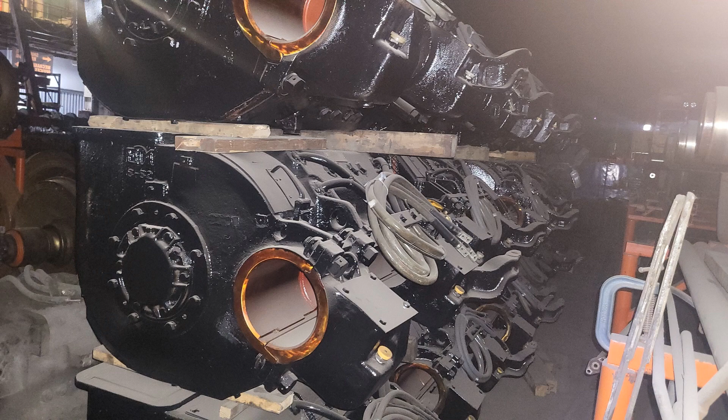In the last video we talked about brake rigging, which is what makes us stop. This time we're talking about traction motors, which is what makes us go. And this is going to be a pretty long one, so brace yourselves.

The list of topics I'd like to include today includes the parts of a traction motor and what they do, how we assemble combos, some of the lubrication and servicing requirements of traction motors, the different gear ratios used for different classes of service. Then we're going to get into a little bit of component theory and talk about how traction motors work, how we switch direction, and how we set things up for dynamic braking and stuff like that.

And then while we're talking about component theory, I'm also going to mention why DC? Why do we use DC traction motors, especially considering more modern locomotives use AC traction motors. So why do these old ones still use DC?

And then before we close out, I also have a couple pictures of some catastrophic failures I got that I think you guys will like to see. So with all that out of the way, let's get right into it.

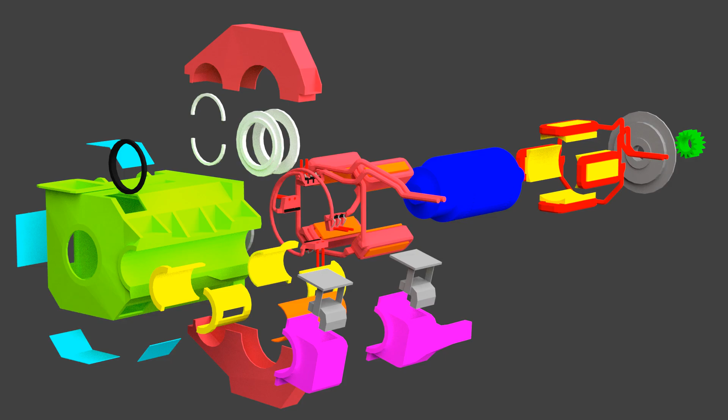Alright, so traction motor parts. What you're looking at here is actually a 3D model of a traction motor that I made. Before we even really get started, I'd like to mention that this model is actually incomplete. Even with all of this, there's still some pieces that are missing, and there's still some stuff that I'm going to kind of hand wave away because I haven't had it apart enough to be able to tell you exactly what everything looks like. Looking at this picture, we're going to ignore some parts now that are going to come into play later whenever we actually talk about combos, so that'll get rid of some of this stuff.

And so that leaves us with this, and this is what we're going to talk about for now. So the first thing we have is this big green block here, and this is the motor frame. The motor frame supports everything predictably, and it also is enclosed on one end, and that actually makes it act as kind of an air duct to help direct the cooling air around the electrical components inside the motor. And it comes equipped with these blue covers that can be removed, and it allows access to the inside of the motor to help perform maintenance or troubleshoot things and the like.

The next thing we have here is this armature support bearing. All this really is here for, this is one of those things I haven't had apart. All this is really here for is it supports this end of the armature and lets everything spin freely.

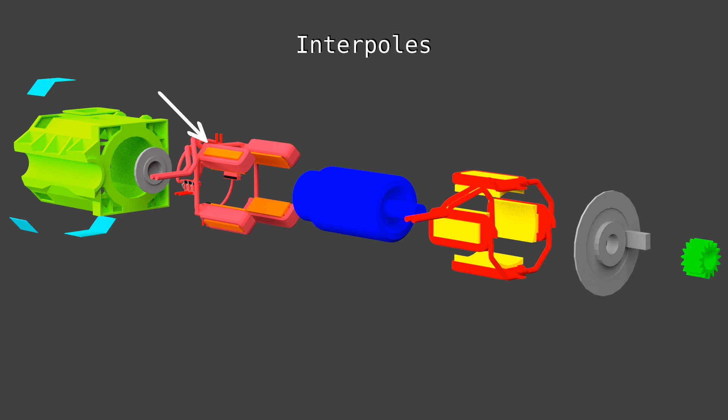The next thing down the line on the model here is the A-leads. And these A-leads feed power to the armature, and also connected to them are these interpoles here. These interpoles, as well as the main poles, consist of a stack of iron laminations to reduce eddy current losses, just like in any other electric motor. But you have this stack of iron laminations that makes a core, and then you have a coil of wire going around it. These are called interpoles, and the interpoles help the electrical characteristics of the motor. It helps ensure proper commutation, which we'll talk about a little bit here when we get to the armature, which is actually next.

The armature here is what's powered by the A-leads, and in a sentence, you put electricity in the motor and you get torque out, and that's how we move down the rail.

I mentioned commutation just a second ago, and what commutation is: as this armature turns, there's a series of bars, which I'll show you in a minute. It's called a commutator because if you know what a commute means, it's where you move from one place to another. Well, the commutator makes it so that the current flowing through the armature moves from one spot to the next down the line as the armature rotates. And that's actually what those interpoles are there for, because as this armature spins, it can distort the magnetic field we have inside and cause issues, so we put these interpoles in to help stop the motor from flashing over.

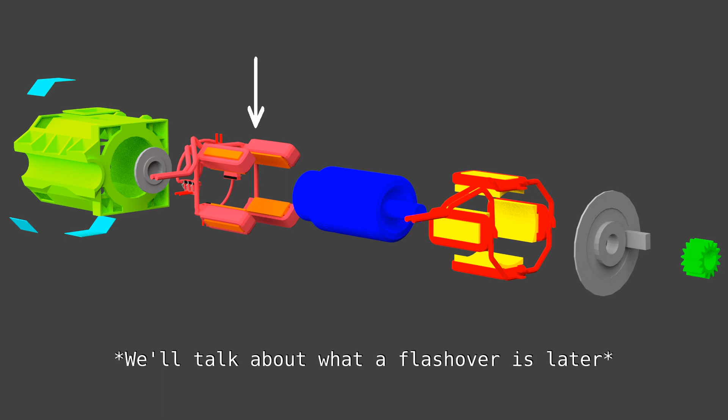Then we also have, on the other side of the armature, the F-leads, which are the main field windings. These are the bigger poles, the main ones that actually provide the torque to turn the motor.

Then we have another armature support bearing past that, and the housing for it is a little bigger than the other one. That's because the way this motor is assembled is you bolt the one armature support bearing in, and you can put all the field coils and interpole coils in. Then you can slide the entire armature down through this side, and put this bearing on the outside, and that's how the inside of the motor is actually assembled.

Then the last component we have out here on the end is the pinion gear. This pinion gear mates or meshes with the bull gear that we talked about on the wheel set. So when this pinion turns, that's what actually applies the torque to the wheel set.

Now, like I mentioned, some of this stuff I kind of hand-waved away a little bit, so I'll zoom in specifically on these parts here on the A-leads. These are called brush holders, and I didn't really model them the greatest because I haven't had a ton of them apart, so let's look at some actual pictures of one of these.

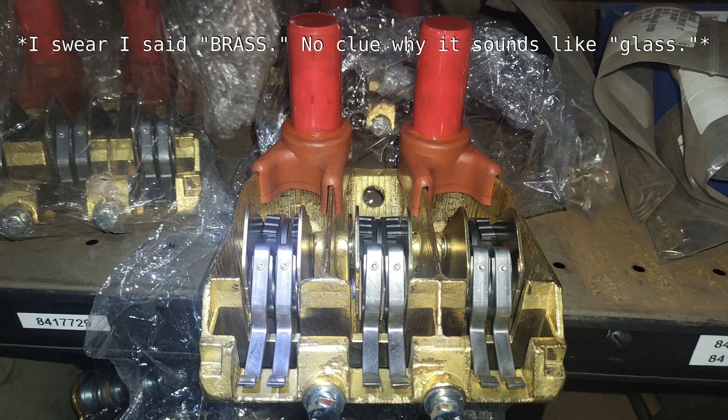So this here is a brush holder, made out of brass, and we have these two red prongs, I don't really know what the technical word is for them. They stick up, and they're wrapped in insulating material, and then these are bolted into the traction motor frame. So these brush holders can actually be adjusted to get the proper clearance from the motor commutator.

The brush holders, predictably, hold the traction motor brushes, and they are held down by these gray hammers here. These hammers are spring-loaded, so whenever you put a brush in, these hammers will put a little bit of pressure on it to keep it in contact as things move and shift and rotate.

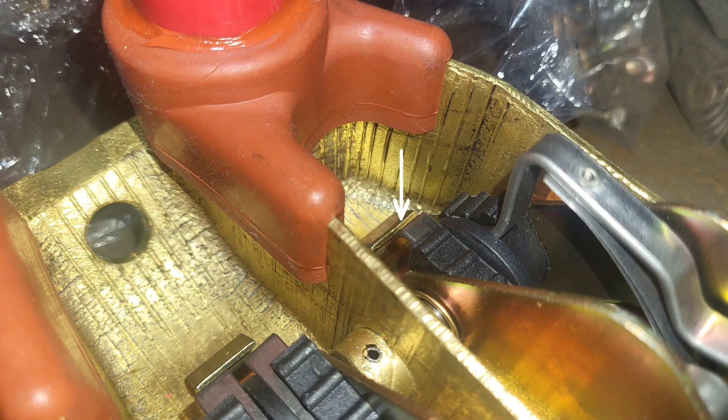Now, to get the brush in or out, there's actually a little tab behind these hammers to where you can lift the hammer up off the brush and slide it down, and it actually locks the hammer in a raised position, so you can pull the old brush out and put the new one in. Now, what's a brush look like?

I've talked about them. Well, this is a picture of what this all looks like when it's actually put together. And here you can see we have these three brushes, and these are just blocks of carbon, I think they're just graphite. And they have these little lead wires come off of them that bolt to the brush holder, because the brush holder is where they actually get their current supply from.

So whenever you change these brushes out, you actually have to unbolt them, pull the old one out, and then bolt the new ones in to ensure you have good connectivity. And you can pull the hammers back out, and they'll press down on the top of the brush just like this shows, and then that pushes them against the commutator.

And here you can actually see what the commutator looks like. You got a bunch of copper bars, so as the armature rotates, the brush makes contact with one bar, then the next bar, then the next bar, and so on down the line. So that keeps the magnetic field of the armature in a good spot to get a lot of torque out of it.

And then while I'm in here and this motor has the cover off of it, I'll show you a picture of what the rest of the armature as well as the main and interpoles actually look like when you look in at the motor from. It's kind of a weird angle that you don't get to see when it's actually inside the truck frame.

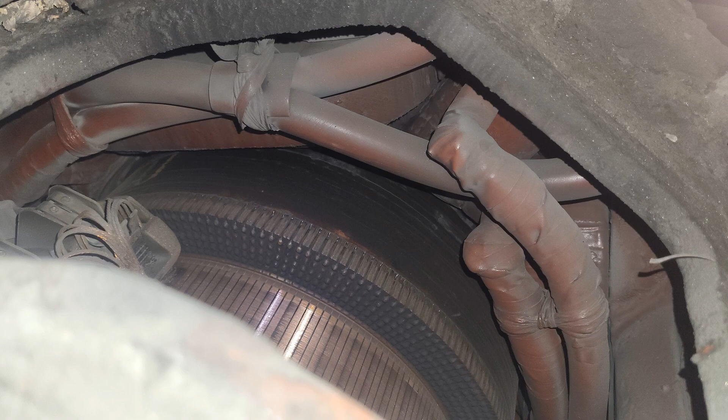So, here's a picture. Here you can see you got the two main poles on the top of the motor and the front of the motor. Then we have an interpole here, and there's another one over here. And then, obviously, the other side of the motor, there's two more main poles and two more interpoles. That's a little picture of what some of the guts of a traction motor look like.

A for armature, F for field. The A and AA leads both feed power to the armature, and the F and FF leads both feed power to the field. These do matter if you ever have to take one of these apart. It's important that A and AA, and so on, don't end up mixed up, because if you do mix them up, bad things can happen. Keep that in mind as we go forward.

Yeah, that's pretty much all the parts of a traction motor. That honestly didn't take me quite as long to get through as I thought it would, so I guess that's nice. Now we're going to move on from here to actually assembling a combo.

Alright, so on to talking about combos. Before we talk about assembling them, I'll blitz through some pictures of some actual combo parts, because I don't have these necessarily modeled 100% faithfully—it's honestly been a while since I've actually had a traction motor apart. So we'll blitz through some quick pictures of some actual parts, and then go through the rough idea of how to assemble them.

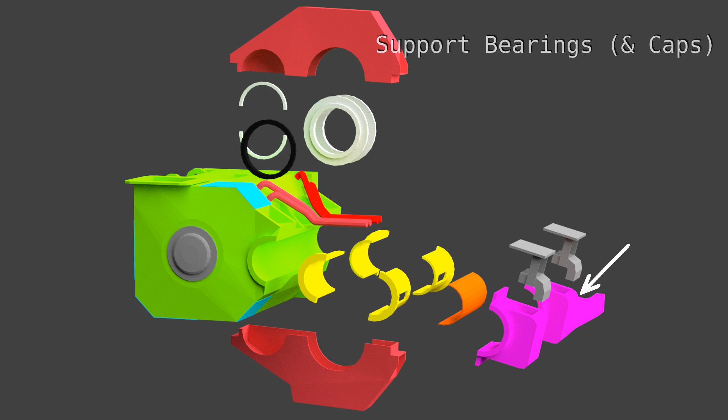Starting with combo parts, you're going to have the support bearings, the support bearing caps, and an axle shield. The support bearing caps have wicks in them for lubrication. You have the gear case, which I'll often refer to as a crater pan, because that's what our truck shop foreman calls them. Then we have a bunch of seals between the pan halves—inner and outer pan seal, a pinion seal, and then a dust seal on the other side of the axle.

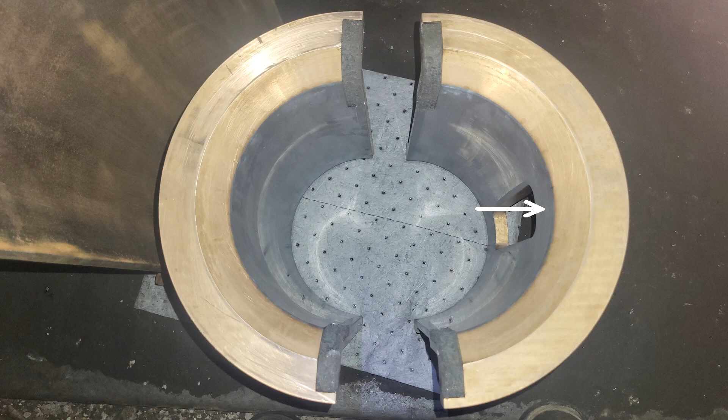First things first, let's talk about support bearings. I'll throw a picture of one up here for you. We have a motor half and a cap half of a support bearing. The way you can tell them apart is the motor half will be solid and the cap half will have a big slot in it, and that slot is for the wick. If you look at the outside faces of the support bearing halves, you can see they have these wicks on them. These wicks are there for lubrication, and they provide lubrication to the hub of the wheel as it shifts back and forth during movement.

If you look at a picture of an actual support bearing cap, you can see it has a slot for the wick, and they're also hollow on the inside, holding a reservoir of oil for lubrication. You can also see that one of these support bearings has this arm sticking off of it, and that's what supports the crater pan. Whenever you assemble these, they have a set of shims that go between the support bearing cap and the motor when you bolt everything together. Just wanted to mention that.

We also have the axle shield. There's not really anything special about it—it's just there to cover the axle and keep dirt and grit out of the support bearings, so we don't wear things out faster than we need to.

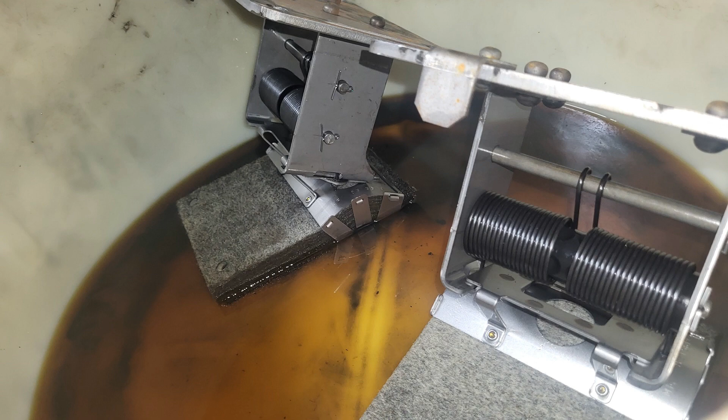The next thing we have is wicks, and I'll throw up a picture of some wicks we have. They're hanging out in a bath of oil to soak, so they're pre-lubricated, if you will, for when they get assembled into a combo. These wicks sit inside the support bearing caps, and the support bearing caps are full of oil, so the end of the wick sticks down into that bath of oil. Just like a wick in an old oil-burning lamp, it wicks that oil up, and as the axle turns, that oil sticks to the axle and gets spread throughout the bearing to lubricate everything.

The next thing we have is the gear case, or the crater pan. The crater pan comes in two halves, an upper and a lower, and the top half has a slot where the bottom half mates into it, and that slot has a bunch of seals that go in there—the pan half seals we'll talk about in a minute.

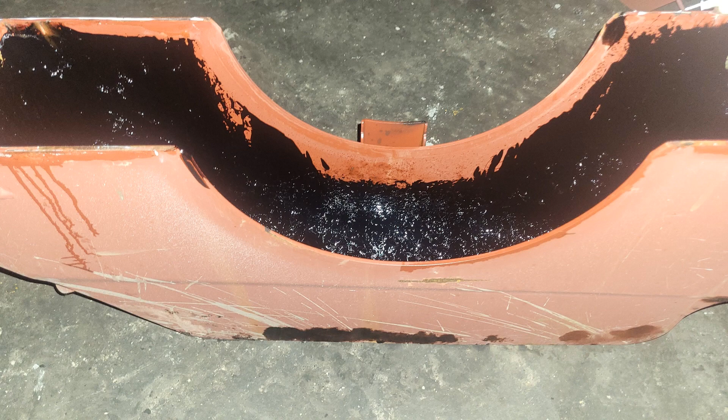Some of these gear cases are lubricated with oil, and some with grease. We'll talk about that in a little bit. But to know the difference, an oil pan on the bottom half will have either a drain plug or a snap cap. A grease pan will have, on both halves, a spring-loaded cap that'll look something like this. This one's dirty as all get out, but it'll look something like that.

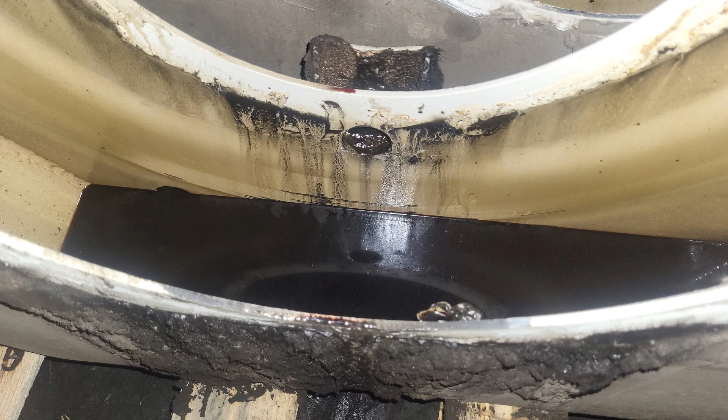If it has one of those on both halves, that is a grease pan. Many, although not all, of these crater pans also have overflows in them, so if you put too much oil or too much grease in it, it can actually run out onto the ground. So you don't want to overfill them, but you do want them full.

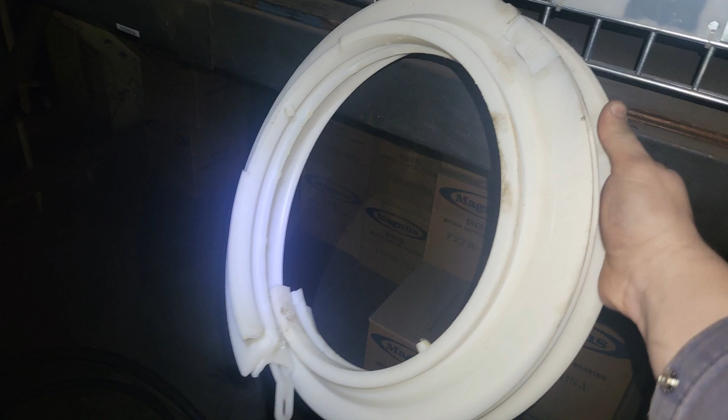As far as seals, these are the pan half seals. They go down in between the pan halves, and they get silicone and everything whenever they go together. We have the inside crater pan seal and the outside crater pan seal. They look slightly different, and the inside seal and the dust seal both have these little bumps that stick out, and there's actually matching holes drilled into the support bearings that hold these seals in place so they don't rotate. We also have the pinion seal, and the pinion seal comes in two halves.

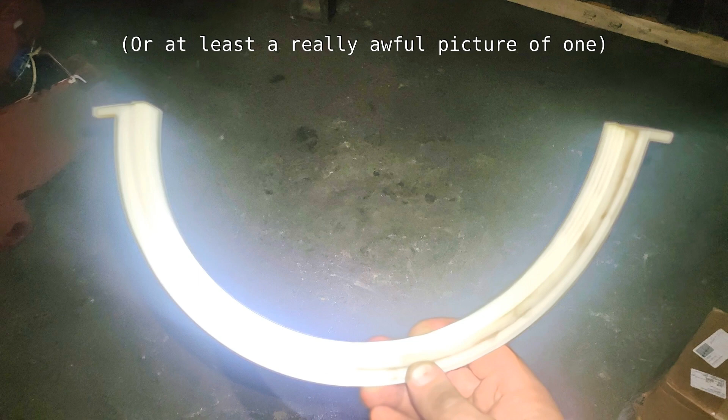Those two halves will look just like this. I know some of these pictures got washed out, I apologize for that, I'm not a great photographer, but the pinion seal comes in two halves, one in each half of the crater pan. Then when you bolt it together, that's what makes the seal around the traction motor.

And then we also have this dust seal, which is on the other side of the axle. And just like the axle shield, that dust shield is there to try and keep grit out of the support bearings. So that was a pretty quick crash course, blitzing through some of the parts that I ignored when talking about the traction motor.

So let's go to a rough overview of how we actually put one of these together. Normally, we'll stand it up on its end so that the bearing end is pointed straight up. So you're going to have to picture all this sitting like that. But we'll put the motor side support bearing halves in, and they'll have their wicks and everything all pre-assembled.

Then we'll set the axle in. Then we'll put the cap side support bearings on and the axle shield. Then we'll put the shims and the bearing caps on and get ready to tighten everything down. Now these bearing caps, whenever you tighten them down, you actually have some funky stuff you have to do.

Because you want to make sure whenever you bolt this stuff down that the support bearings are lined up correctly. So what you end up doing, and it's a real treat, it takes two guys to do this. You'll have one guy with two pry bars. He'll use one pry bar to pry the axle away from whatever side you're tightening. And then he'll use the other pry bar to pry the bearing cap you're tightening out against the wheel hub. That way you can make sure everything lines up flush and nice and pretty and goes together right.

So you have one guy holding all that, and then the other guy will take an impact and tighten these. And if I remember the torque spec correctly, they go to something obscene like, I think it's like 1,200 or 1,400 foot-pounds. Don't quote me on that, I'd have to actually go look. But yeah, you tighten the ever-living daylights out of them.

And then whenever you get to one side done, then you got to go do the other side. And there is one side that you're supposed to do first, I think, and I can't for the life of me remember, or it might not matter. But yeah, those are a treat to do. It takes two guys and a good bit of elbow grease.

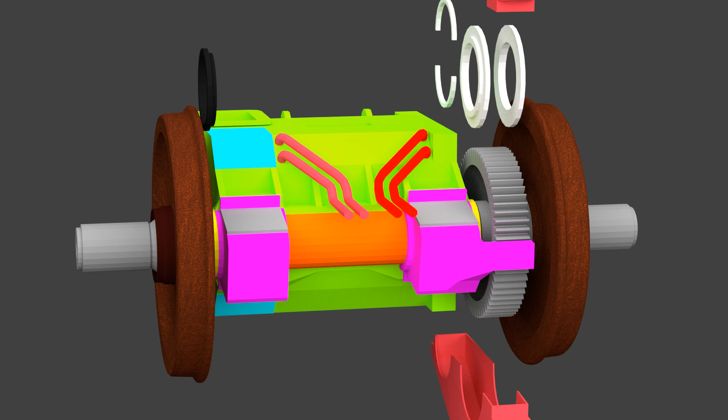Then the next thing we'll put in is the traction motor wicks. These have been soaking in a bath of oil like I mentioned, so they should have some oil in them to lubricate everything. Then you will take the dust seal, the inner and outer crater pan seals, the pan half seals, which I don't have modeled, and the pinion seals, and all assemble them all together into the crater pan.

And then the last thing we'll do is a lot of this stuff gets siliconed as it goes together too, I forgot to mention until now, sorry. You put all the seals in the pan halves, and then you bolt everything together. Some of these things you got to make sure they line up. But yeah, you bolt everything together with the pan halves.

There's different ways that these pans can be attached. Some railroads use huck bolts. Some of them have a special type of bolt and clamp that gets used. Huck bolts tend to be more reliable, but you also need specialty equipment to put them on and take them off.

There's ups and downsides to everything. Once you get the pan halves bolted together and everything assembled, the last thing you're going to do is actually test run the motor.

We have a welder that we can use for it. You hook it up, and all it does is shoot electricity through the motor. Because it's sitting out and not actually under a locomotive, it doesn't take much to get everything to turn. As you do that, you want to listen, make sure you don't hear anything scraping, grinding, or any weird chattering from the gears, or anything suspicious of something being wrong.

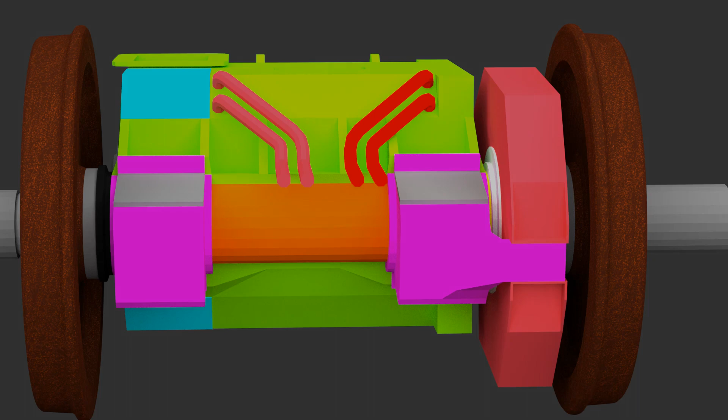That way whenever you put the thing in, it's going to perform and not destroy itself. So that's a quick synopsis, a brief overview of what it takes to get a traction motor combo put together.

I'll mention a little bit here too—we'll talk more about this in the next video on truck frames—that these combos can actually be changed if you have a drop table or something like that, without removing the truck from the locomotive. It's kind of neat. These traction motors are actually suspended on the axle by your support bearings, and the other end is suspended by something called the nose suspension, which is in the truck frame.

That nose suspension is there because as the motor tries to turn, which is easier—to move an entire train or to lift this little 5 or 6 ton motor? It's going to try and move the motor. So whenever it tries to turn the wheel, the pinion on the motor is going to try and walk around the axle, and that's not great. You want to absorb that force, but you also don't want to be slamming stuff back and forth.

So they put a spring pack in there, which will look something like this, that holds up one end of the motor. Now, to get that motor out, provided it's in a friendly place for you on the truck, you can actually block the truck frame.

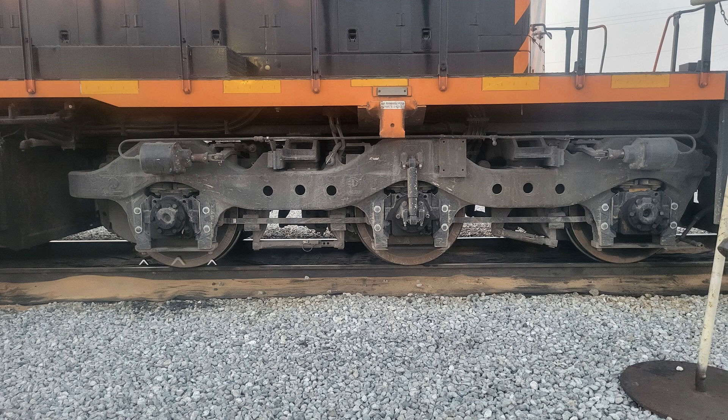You can take two bolts out and drop this thing out on each side. This is called the pedestal tie bar. If you have single shoe brake rigging, that's all you have to take out. But if you have clasp brake rigging, now you have to take out the brake straps too in order to get this down out of here.

Remember when I mentioned that clasp brakes are kind of not preferred because they're a pain for maintenance? Yeah, this is one of the things—brake rigging almost never wants to come apart. Anytime you got to drop a combo out and you have clasp brake rigging, you have to take the brake straps down, and it's a pain and a bunch of extra work.

So with the single shoe brakes, all you got to do is pull the pin out of the slack adjuster. Then you can just drop the pedestal tie bars, and you can actually lower the motor and it'll pivot off of that nose suspension, and then it can be dropped out without having to remove the truck. It's a pretty neat little thing that we do.

I don't have a ton of pictures—hopefully I can put an animation of that together in the next video when we get to truck frames, but I figured I'd mention it here because it was kind of neat. It does act as a bit of a segue into our next section, which is on lubrication and maintenance anyway, so let's talk about that.

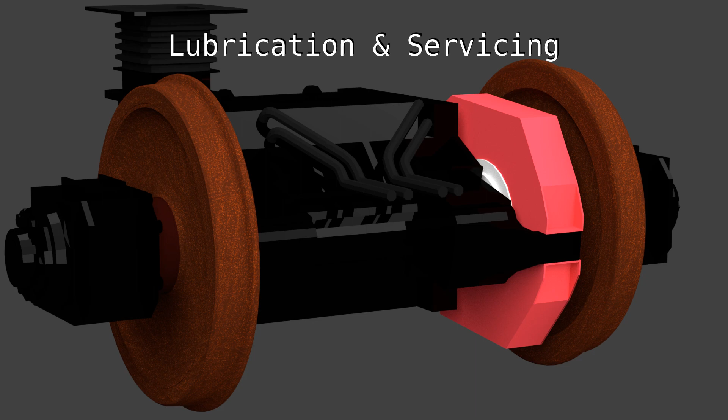Alright, lubrication and servicing of traction motors. As usual, whenever talking about maintenance on the railroad, the FRA has something to say about it, although in this case there isn't that much. The only part that deals with anything is 49 CFR Part 229.91, which covers motors and generators. We'll blitz through that relatively quickly because there ain't much to it.

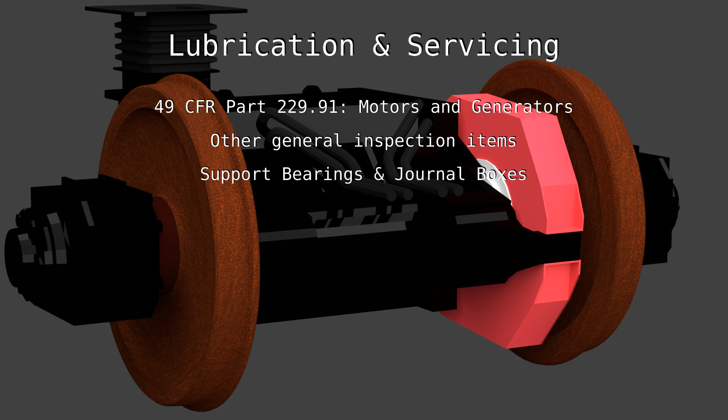A small amount of your inspection items stem from 49 CFR 229.91. It basically states that a motor or generator may not have any of the following conditions: A, be shorted or grounded; B, throw solder excessively; C, show evidence of coming apart; D, have an overheated support bearing; or E, have an excessive accumulation of oil.

Shorting or grounding of a motor can be checked with a device called a megohmmeter. What a megohmmeter does is take a voltage and step it up to something stupid high. I think the one we have goes up to 5,000 volts, and it flashes that into the system and looks at how much current that's able to push. That's a way for checking insulation in high voltage circuits. It's also called a high potential tester.

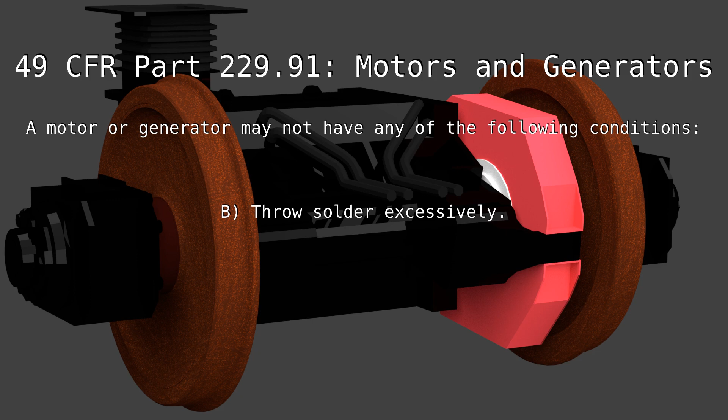Throwing solder has to do with arcing and flashing inside the motor, because arcs get really hot and they can melt things, and one of the first things to melt is solder. It'll fling it out on the end of the motor, and usually they look like little BBs.

They cannot show evidence of coming apart. That really has to do with bearings, cracks, bolts being loose, those types of things. You don't want to see an overheated support bearing, which usually there will be more signs than a heat signature, because these motors tend to have pretty thick paint on them and a lot of dirt. So you don't really see a heat signature, but you'll usually know if the support bearing's bad.

Motors also aren't allowed to have an excessive accumulation of oil. That accumulation of oil is, in a lot of cases, going to come from the car body above the truck. It'll leak down and drip onto the traction motor. So they just can't be completely covered and running in oil. A little bit here or there isn't a big deal, but you don't want a ton of it.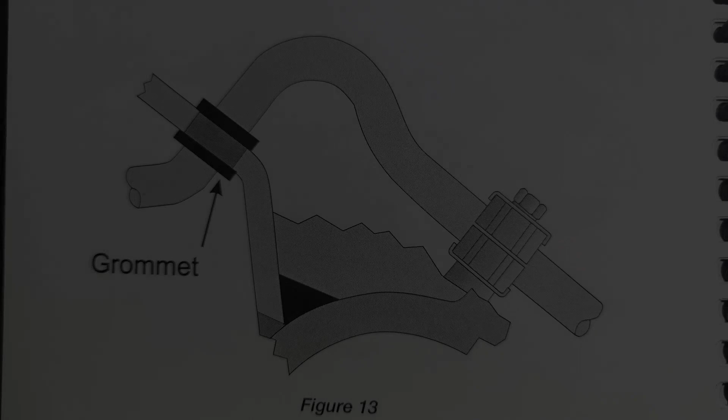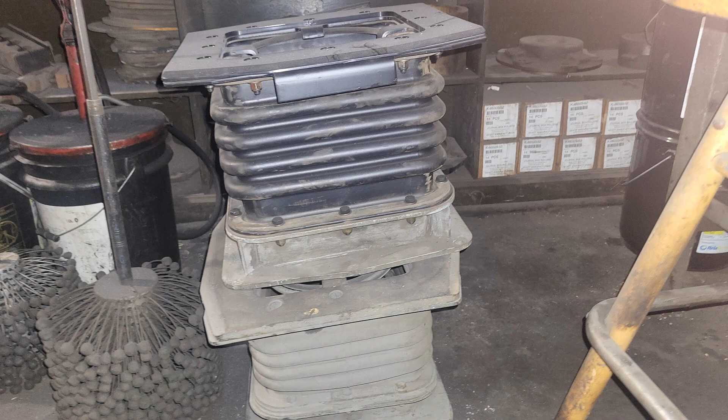Other things that should be checked whenever you're looking at a traction motor: you want to check condition of things like lead clamps, the grommets that the leads go through. You want to check the snap caps, the cooling air duct to make sure that's in decent condition. And you want to check any seals you see, your crater pan seals, your pinion seal, and the traction motor covers. Those covers actually should also have gaskets under them, because if there's not a gasket there, your cooling air can basically bypass the motor. It'll come down the duct and out the cover instead of actually going through the motor.

So that kind of covers your general first look at things. When it comes to support bearings and journal boxes, these are both lubricated with the same oil. It's called car oil or journal oil, and I would suspect that term actually stems from back when we used plain bearings or friction bearings. This was the same oil, I'm guessing, that got used to lubricate those bearings. So it's still being used to lubricate axles, just now we have roller bearings instead.

Both usually have a snap cap where the oil is added. I'll point one out here because I've mentioned these a few times. I don't think I've ever actually showed one.

Both the support bearings and journal boxes, if you look at the oil, you want to check for any signs of failure. Usually that'll be in the form of metal particles. If a bearing starts to fail, usually metal will start to flake off and get into the oil and start getting mixed up with it. So if you open one of these and you see metal particles, that's a pretty good sign that something is wrong.

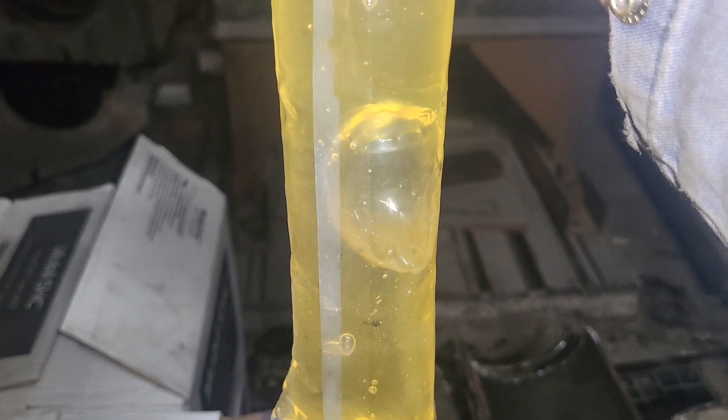The oil is a very heavyweight oil, and I'll throw a clip of it up here, some of that oil in a bag, and if I flip it over you can see just how long it takes for the bubble of air in that bag of oil to actually reach the top. It's very viscous oil, because it's dealing with a lot of pressure. It's very sticky compared to most oils because we want it to stick to the gear and actually lubricate everything.

Grease pans will contain what we call crater compound or crater grease, hence the nickname crater pans. And that also comes in bags, and they usually look like this.

This is like an actual soft-ish kind of grease. Here's a video again, you can see you can squeeze it, but it's not a liquid, it's an actual grease. And again, this is very sticky, and a lot of railroads seem to use this. We don't, just because it's a pain in the butt to deal with whenever you're actually assembling combos.

A big thing that's nice about grease is that grease doesn't leak like oil does. This grease is also very sticky because, again, we want to make sure that as everything speeds up in there, you're going 60 miles an hour down the track, you don't want to fling all the lubrication out of your gears and burn things up.

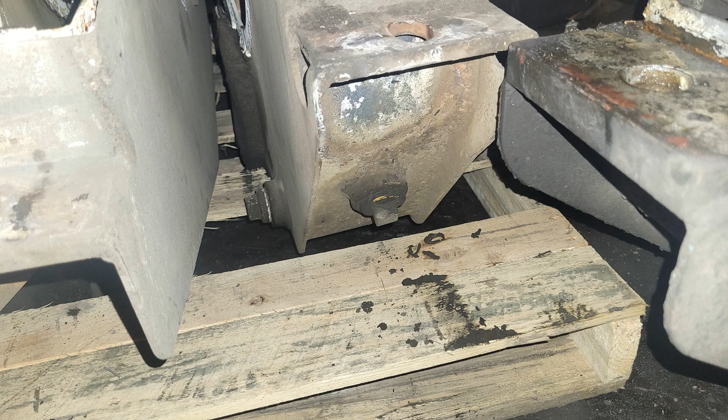To check the lubrication level in these pans, usually an oil pan will have either a drain plug like a differential or a snap cap just like the support bearings and journal boxes, and you can pull that out and look in and check the fill level. You can add oil through the plug, or usually there's another plug on the top half of the pan. You can open that one and add.

I usually like to keep about 3.5-ish inches in the bottom of the pan. That's just a rule of thumb. Different railroads and different pans, I'm sure, have different numbers.

Grease pans will typically have a spring-loaded cap, and that cap can be removed with a special tool to check the amount of lubrication that's in there. And those big caps are how you can add bags of grease or oil to the crater pan.

This is kind of hilarious to me, because the first time I found out about this, I assumed you would cut the bag and squeeze all the grease out of it. But no, the first time I saw this, it was a brand new combo we just rebuilt, and we were test running it.

Before we set it down and put it back in, our truck shop foreman lubricated it, and all he did was just held up a bag of oil or a bag of grease over the gears while it's sitting there running and just dropped it in, and the motor just bogged down and chewed it up, and he dropped three or four of them in there. So yeah, those bags can just go in, plastic and all, and the gears are just om nom nom and chew the plastic up, and the lubrication does its job.

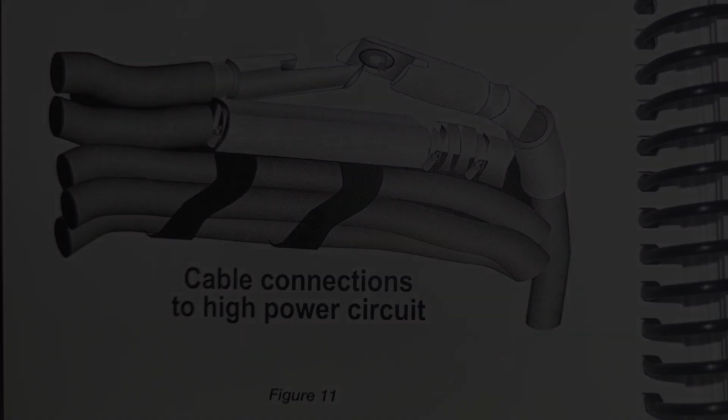Other things you want to check about the cables: check for cracked insulation, cuts in the insulation, broken wires, and signs of overheating. You want to make sure they have lead boots, with no signs of overheating, cracks, or wear. You want to make sure the lead boot is properly positioned, supposed to be at least 2 inches from the exposed metal on the lug. So you put the lead boot on, bolt the lug up, and then slide the lead boot up so ideally it's centered over that lug connection area, and that provides your insulation.

In addition to your 4 main leads that we talked about, there's also a smaller ground strap that should be checked. You want to make sure it's connected tightly to the locomotive frame, and also make sure that it's not broken.

The insulation doesn't really matter on the ground strap, because all this is here for is if something inside the motor arcs somewhere it's not supposed to, this will allow that current to flow back to the car body, which will trip the ground relay and let the crew know something is wrong. So the insulation doesn't really matter, but it does have to be on there tight and it can't be broken, or else it doesn't work.

If you are removing a motor to replace it, you should label the cable connections on the locomotive end, which one goes to which, because sometimes it's not very obvious, and if you hook them up wrong you can have a traction motor that doesn't work at all or one that loads backwards. Ask me how I know you can do that, because that was a fun day, let me tell you.

Alright, so gear ratios. This seems like kind of an odd topic because diesel-electric locomotives don't really have a proper transmission. It's just a traction motor and then the axle. So there's no real transmission. You don't have gears to shift like you would in a car or truck, but there are different gear ratios that are available.

Usually when you buy a traction motor, they will come with a pinion on it, and you can order which pinion it gets. The pinion is held on with a specialty nut, and you can remove that nut and either pull the pinion off or cut the pinion into 2 or 3 pieces, and those pieces will fall off. So my point here is the pinion can be removed.

You can't really change the bull gear on the axle, you'd have to buy a different axle. But the ratio between the number of teeth on the pinion gear and the number of teeth on the bull gear determines a couple things.

It determines how much tractive effort you can get out of that axle. The more aggressive the gear ratio, the more torque you can put on the axle. It will change the minimum speed you need for continuous drag and full horsepower, because we'll get into that nuance way later on when we're talking about excitation. But there's a certain amount of speed a locomotive has to be going before it can actually put down its full horsepower to the rails.

And the last thing that the gear ratio affects is the top speed of the locomotive - this is the other side. The more aggressive the gear ratio, the faster that armature has to spin in order to make top speed. I'm not sure if it's limited based on how fast we can spin the armature before it starts to arc and do weird things electrically, or if it's more of how fast can we spin the armature before it starts to fail mechanically. But either way, the more aggressive the gear ratio, you get more pulling power and a lower speed for full horsepower, but you have a lower top speed overall.

Now that's a little talk about gear ratios. And the way you can tell what one you have - usually it doesn't say anything on the pinion, you just kind of have to count the teeth on it. But usually if you look at the bull gear, and I'll throw a picture of one up here, usually somewhere on a bull gear, on a wheel set, there's a painted number that tells you how many teeth are on that bull gear. All of our EMD motors are set up for 62 to 15 gear ratios, so ours will all say 62.

Different manufacturers use different gear ratios, like GE's are, I believe, 74 to 18. It's just a different use case - there's more teeth and they're smaller, whereas the EMDs have their 62 to 15, a little bit less teeth.

So now we get to go on into the really fun stuff, and that is component theory, and you're going to get to watch me try and draw some prints in Photoshop. So have fun.

Alright, now for the fun part, which is you guys getting to listen to me, someone who's not a physics major nor an electrical engineer, try and explain how an electric motor works. This should be fun. Before we get to that, though, I want to explain some symbols and show you what one of these would look like on a print.

What you're looking at here is a simplified print of what a traction motor would look like. Now, these symbols, if they look a little funky to you, that's because they're different from ISO symbols, which is what literally everybody else uses and was what I was used to before I came into the industry. Enjoy that, you're just going to have to deal with it.

At the top in the center we have a symbol labeled main gen. Now typically they're actually alternators, but they'll just say main gen, or sometimes main alt, traction alt, but pretty much everyone I've ever seen still says main generator. From your main gen you go over to your positive bus and negative bus. So all the positive connections that come out of the main gen come out of this positive bus, and all the negative connections come out of this negative bus.

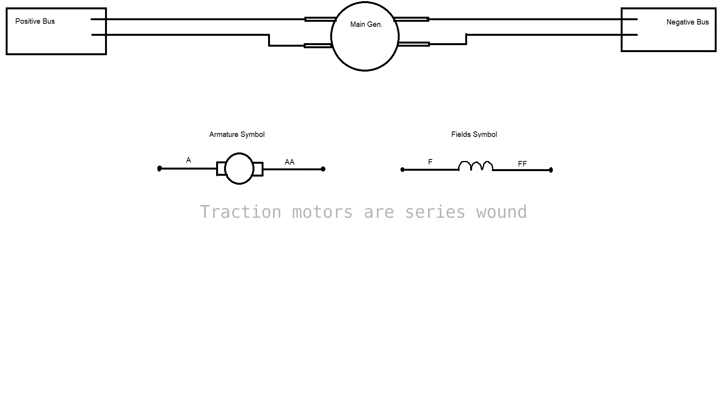Now, the traction motors that we use in locomotives are all series wound motors. Now, what does series wound mean? A series wound motor is a motor in which the current flows through the armature and through the fields, all of it. All the current goes through the armature, all of it goes through the fields.

This is different from a shunt motor, where instead of being in series through the armature and then through the fields, it is in parallel. So it comes in, it forks, some of the current goes through the armature, some goes through the fields. We do not use those for traction.

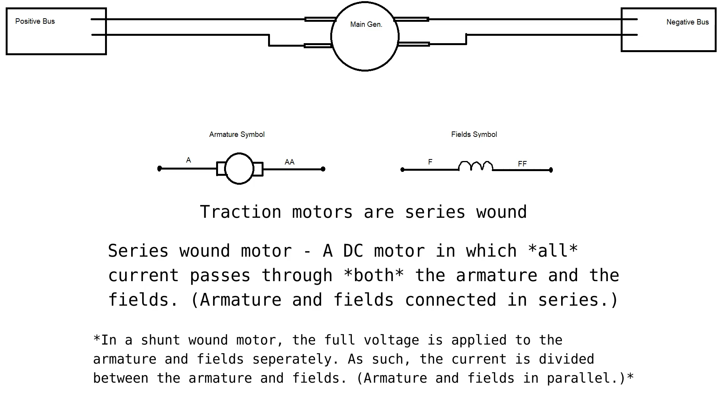And the main reason for that is a series wound motor, you can shove a bunch of current through it, and that gives you an insane amount of starting torque to get the motor to start rolling. And when you're trying to start 20, 30, 40,000 tons of train, a lot of torque is exactly what you need to try and get things moving.

So, knowing that these are series wound motors and we have to get current from the armature to the fields or fields to the armature, whenever we go to test these motors, remember I mentioned test running them before we actually put them in anything, we simply connect the AA and F leads together. I'll represent that here just by drawing a line. Usually we just bolt them together.

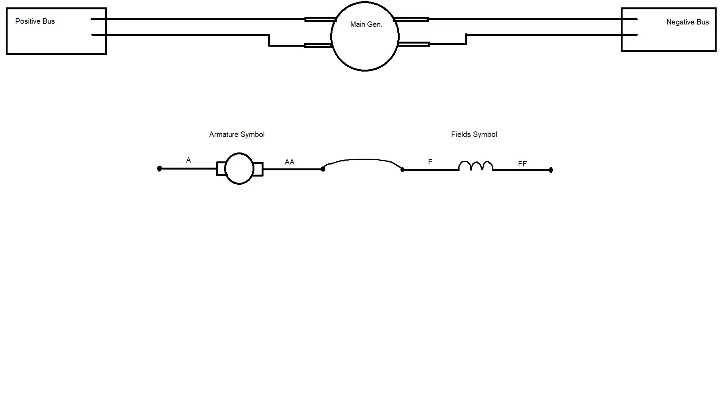Then we'll take a welder that's set up for this kind of application, and you can clip the positive lead on the A lead and the negative lead from the welder on the FF lead. And you turn the welder on, it'll put power through the motor and it'll turn the motor forward.

And when I say forward, what I mean is it will turn the motor in such a way that the axle will drive in a direction that will pull the motor towards the support bearings, if that makes any sense. I consider the support bearings the front of the motor. So if you turn the wheel set in such a way that it pulls the motor towards the support bearings, that motor is turning forward.

So if you put the positive lead on A and the negative lead on FF, the motor turns forward. Now if you turn the welder off and flip them around so the positive lead's on FF and the negative lead's on A, turn the welder on, the motor will turn forward.

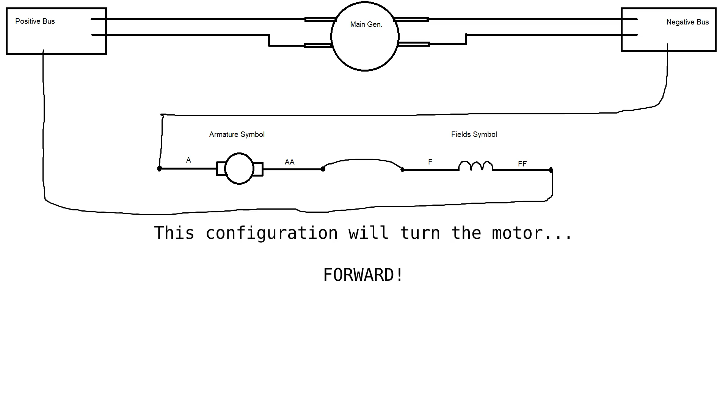This is a kind of confusing thing about traction motors because they're not permanent magnet motors. If this was a permanent magnet motor, that would have worked. This is not a permanent magnet motor.

So how do we get reverse? Well, to get that, we have to change what leads are connected. So if instead of connecting the AA and F leads, we instead connected the AA and FF leads, and then we stick our positive on our A lead and our negative on our F lead, then we'll get a reverse rotation out of it.

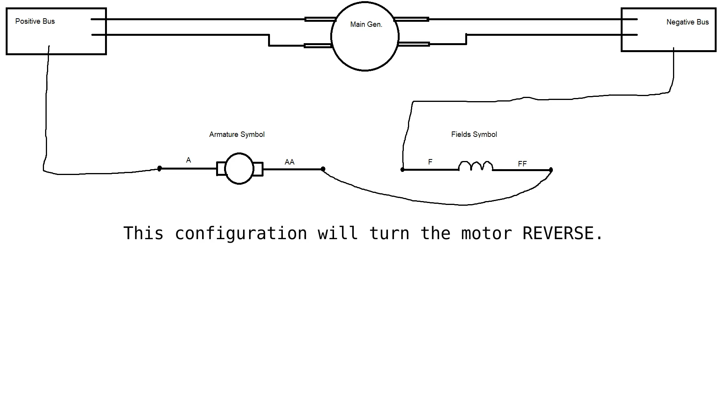So why the heck do we need to do all that? Well, to explain that, I'm going to call on this simplified diagram I made, in all of its beautiful asymmetric glory. It's simplified because we are completely ignoring interpoles. You don't need to worry about them for this. They're just there because the motor field flux gets distorted when you try and actually use it.

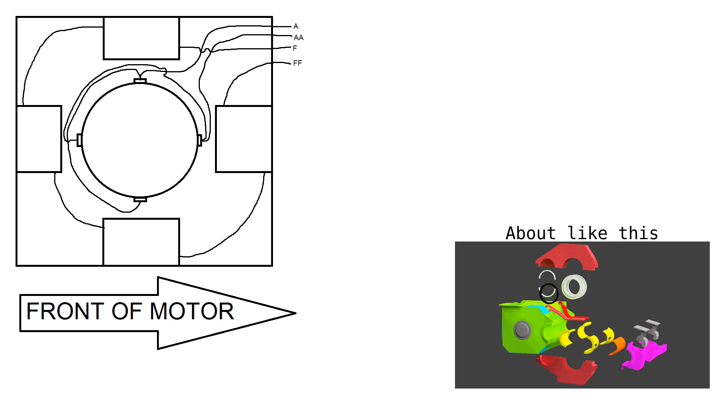So what you're looking at here is the traction motor from the commutator end. Am I making sense here? You're looking at the commutator inside the traction motor. This is opposite of where the pinion gear is. So the front of the motor is going to be where the support bearings are, which would be on your right. So if the motor's rotating forward, it will drive the bull gear in such a way to drag the wheel set and the motor to the right.

Okay, so there is a rule for figuring out how a motor works, and that is Fleming's left-hand rule. So if you take your hand and you hold it out in a pose like this, where your index finger, middle finger, and thumb are all roughly perpendicular to each other, that's the left-hand rule.

Your index finger represents the magnetic flux. Now, flux is just a fancy word they use in physics to represent lines of force. And the lines of force on a magnetic field are said to point from north to south. So if you make a north pole on a magnet, your finger would be pointing away from it, and a south pole, your index finger would be pointing towards it.

Your middle finger is representative of current. And in this rule, we're using conventional current theory because this was before quantum mechanics was discovered. So Ben Franklin, whenever he came up with current theory, didn't understand what quantum mechanics was and had a 50-50 shot at getting it right, and he got it wrong. So he said current went positive to negative. The thing was, we found out what we thought was a negative charge was actually electrons, and that's what's actually moving. So even though electrons move negative to positive, and that's what gives us current, we still, in a lot of applications, describe current as flowing positive to negative. Because, again, Ben Franklin had a 50-50 shot and got it wrong, and we're all paying for it 250 years later.

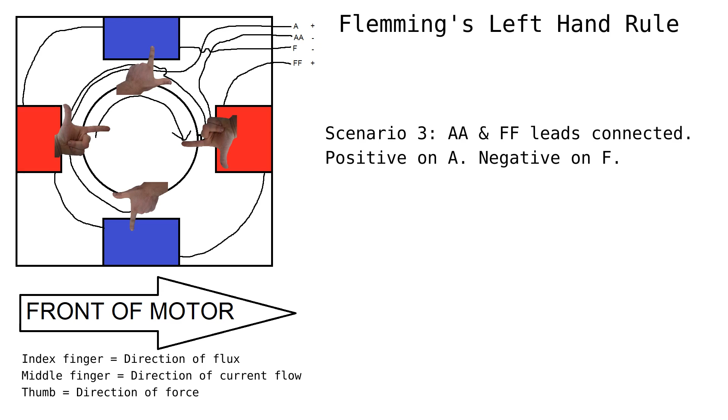Now look at my thumbs. They're all pointing the opposite direction. So now you get the armature to rotate clockwise, which will drive the bull gear in such a way to push the motor away from the support bearing end. This is how you get your reverse direction. You change either the armature current or the field current to change the way the armature will rotate.

Now that that's out of the way, hopefully this is all making sense to you guys. I have a little rule for you to figure out which way a motor will turn. So if you write out your leads, A, AA, F, FF. This is the same order they're in if you look at the front of the motor.

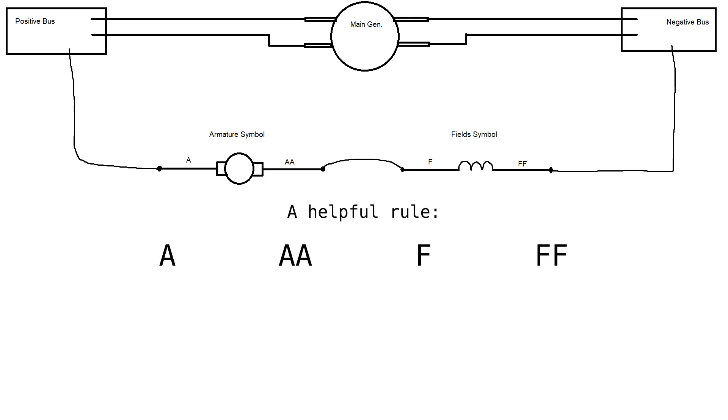So if you start on a print, start from your positive and follow it along and note the first lead you come to. It will be labeled on the print. So if we go to our first scenario, that's A. Then you're going to come back out on, if you go in on an A lead, you should come out on the other A lead. So in this case, we go in on A, we're going to come back out on AA. So you're going to draw an arrow from A to AA.

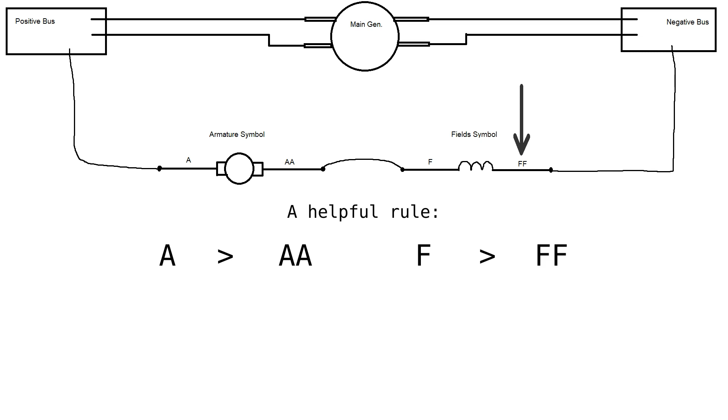Then you're going to go to the third lead you come to, which in this case will be F. You're going to start on F and draw an arrow to the last lead, which you're going to come out on, which would be FF. Look at those two arrows you drew, and if they're both pointing the same direction, doesn't matter if it's left or right, but if they're both pointing the same direction, the motor will turn forward. If the arrows point in opposite directions, the motor will turn backwards.

So again, if we go through our second scenario, remember, that still makes the motor turn forward. We have FF, F, and then AA, A. The arrows are pointing the opposite direction of what they were the first time, but they're still both pointing in the same direction, so the motor will go forward.

Now if we go through our third scenario, we have A, AA, FF, F. These arrows are pointing at each other, pointing in opposite directions, so the motor would turn backwards.

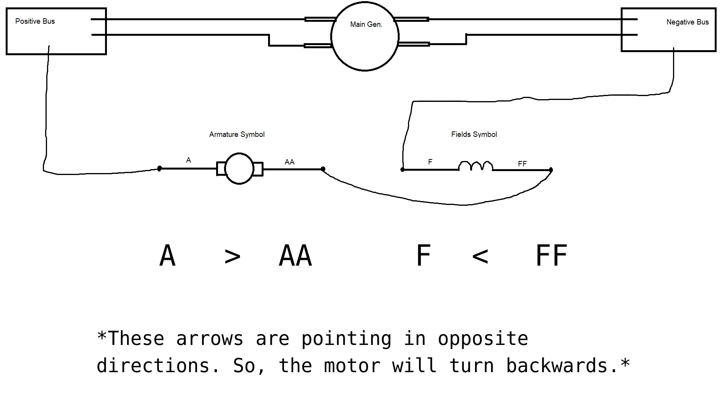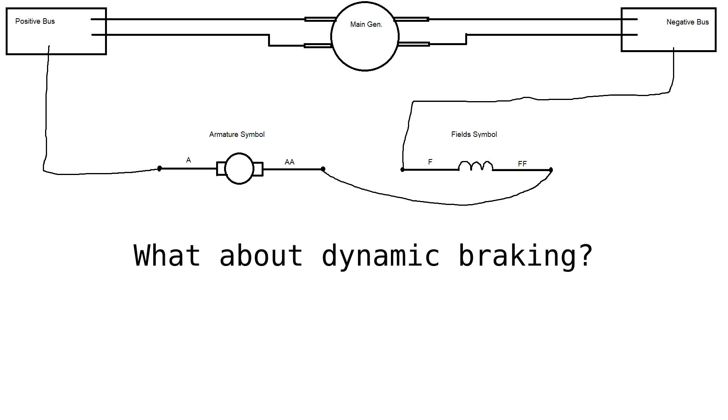Hopefully that all made sense, because as long-winded as that was, we still have a little bit more to go through. We not only use our traction motors for power, but we also have dynamic braking, and another topic I want to get into, which has to do with back EMF and why transition is a thing. So now you get to listen to me try and explain the right-hand rule, but if you understood the left-hand rule, it should be relatively simple.

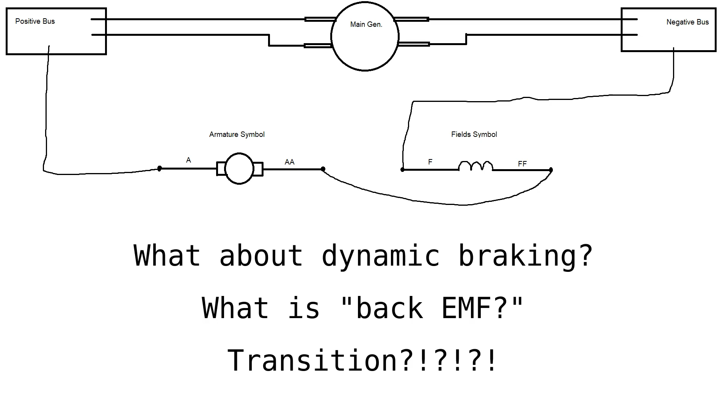So let's talk about dynamic braking a little bit. What exactly is that? Well, in a sentence, it's a method of slowing down a train that doesn't rely on brake shoes. Brake shoes wear out and they can get too hot and stop working, so this is a different way of slowing things down.

It's kind of analogous to a jake brake on a truck, in the sense that we use the drivetrain to slow down the vehicle rather than the brakes. But it's not a great analogy either, because it's not actually the engine. In a truck, the engine's mechanically connected to the transmission, but in a locomotive, the only thing mechanically connected to the wheels is the traction motors. So instead of using the engine, we use our traction motors.

It's called dynamic braking because you have to be moving for it to work. It won't hold you stopped. A friction brake, like your air brakes, will hold you in place even if you're not moving. A dynamic brake does not do that. You have to be moving for it to actually do anything.

A basic overview of how dynamic braking works is we alter the connections to the traction motors in order to turn them from motors into generators, and the created electricity is dissipated across resistor grids on top of the locomotive. The energy required to generate that electricity comes from the kinetic energy of the train, and so this ends up slowing us down.

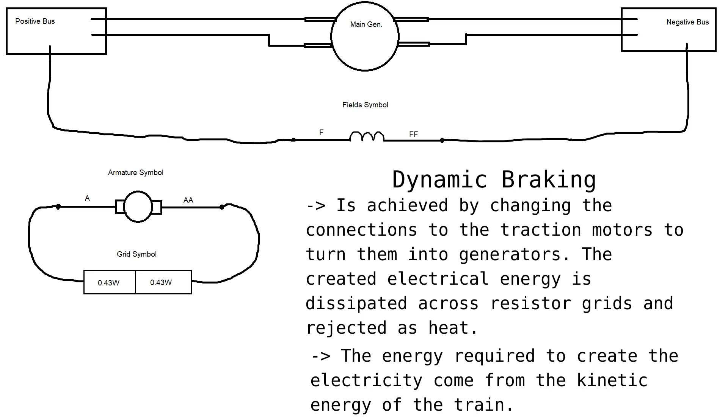Also, before we get into a more detailed explanation, fun fact for you: SD40s or SD40-2s will actually create more horsepower in dynamic braking than they do in motoring. They make about 3,000 horsepower in motoring and not quite 3,400 horsepower during dynamic braking. So there's a little fun fact for you.

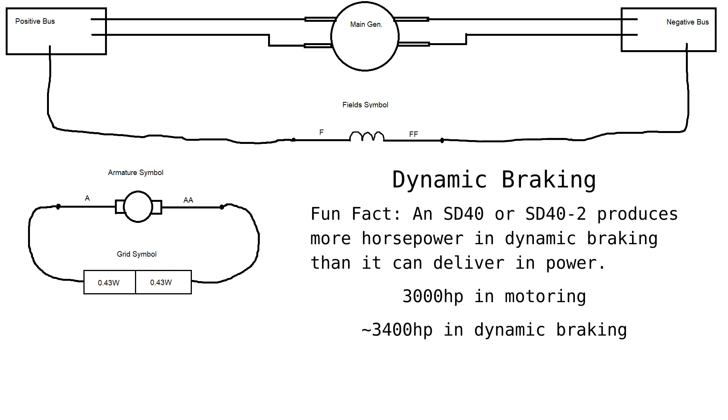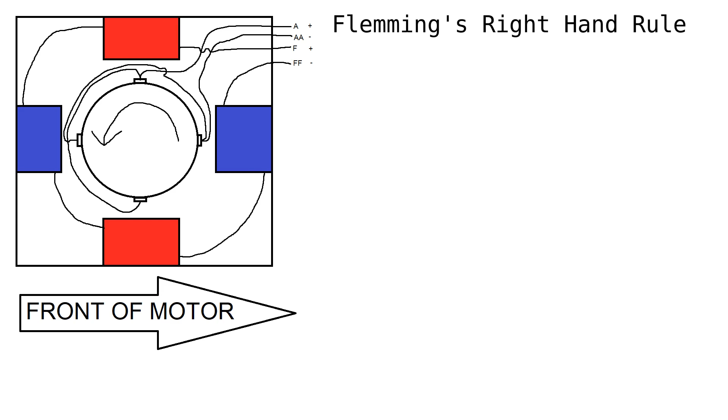Anyway, on to the actual explanation of how this works. Just like Fleming had a left-hand rule that applies to motors, he also has a right-hand rule that applies to generators. The nice thing about the right-hand rule is you make the same exact pose as with the left-hand rule, and the fingers represent the same thing. Your index finger still represents field flux, your middle finger still represents current, and your thumb still represents force. However, the right-hand rule applies to generators instead of motors.

Basically, what the right-hand rule boils down to is: if you have a conductor moved in the direction of your thumb through a magnetic field that points in the direction of your index finger, the current will be induced in that conductor and will flow in the direction of your middle finger.

So if we go back to our little motor diagram, this is the exact same diagram as our sample 1 from earlier, the positive on A, etc., except this time the positive is actually on F and the negative is on FF. We're just going through the fields and then spinning the armature mechanically. We're also only going to be focusing on the top pole because I'm lazy as usual, trying to save myself time and my computer some render time.

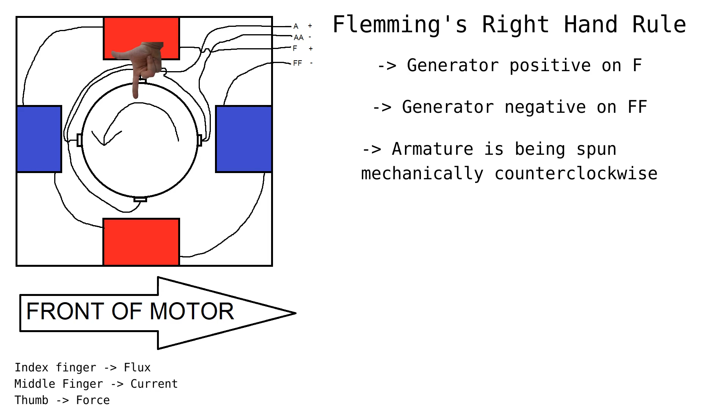So the locomotive is already moving forward in this situation, so the armature will be turning counterclockwise. Remember, we have a bull gear on the opposite side. The flux is going to be pointing in still, because the current flowing through the fields is still flowing in the same direction, F to FF, just not going through the armature first. So the flux is going to point in or down at this point, and the armature is turning counterclockwise, so my thumb's going to point left. And that leaves my middle finger pointing out of the screen at you.

So this will turn the A lead, which is connected to the top brush on the armature, positive. So A is still positive and AA is still negative, but you've got to keep in mind that now we're talking about induced current rather than demanded current. So the induced current is actually flowing in the opposite direction compared to what it was when we were motoring.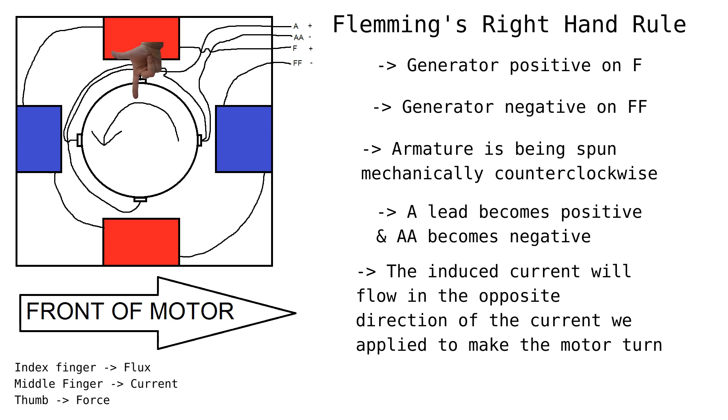And during dynamic braking, that induced current is dissipated across the resistor grids, which will slow us down. The resistor grids convert that all to heat, and there are fans up there that blow it off to the atmosphere. There's a lot more that goes into dynamic braking, but that's going to be probably several videos way down the line when we get to electrical stuff.

Now hang on a second. The field current is exactly the same as in our first situation, but the induced current flows in the opposite direction. Does that happen in motoring, when we're trying to move the motor? Yes it does. Enter back EMF, or backwards electromotive force. So you have a motor, and you're trying to shove current through it to make it turn. Well, as that motor starts to turn, there's a voltage induced in the armature that's opposing the current you're trying to shove through that motor.

So to visualize this, you can hold out your left and right hands in the rule pose I told you about, where all your fingers are perpendicular to each other. Notice how your middle fingers point at each other if your index fingers point the same way. That represents your right hand, which now represents the back EMF. The faster the motor is spinning and the stronger the field current, the greater that back EMF.

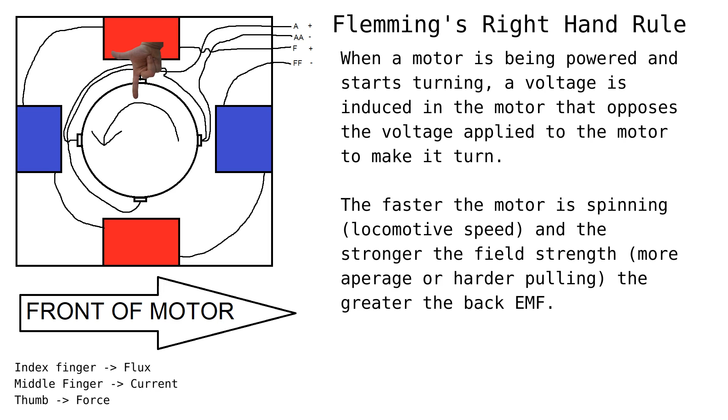In practice, this means that the faster the locomotive is moving and the harder it's trying to pull, pulling harder means drawing more current, the more voltage you need to shove through that motor to overcome the back EMF it's creating. In theory the voltage should just keep climbing and climbing, but we have a certain limit where the insulation on our equipment will fail, and we want to stay within that for safety purposes.

So this is why transition is a thing. In a sentence, transition is changing the connections to or around the traction motors in order to deal with the back EMF created by the rotating armatures.

It's important to note that not all locomotives have a transition process. For example, a GP newer than a GP40 and an SD newer than an SD60, I believe, will not have a transition process. They just connect the motors to the generator and away they go.

Older locomotives, like GP35s, and even some older SD40s and SD45s, use field shunting resistors, which I won't talk about much other than what they are: they're connected in parallel with the motor field so that some current can go around the motor field, which reduces the field strength and allows you to continue accelerating because reducing the field strength reduces the back EMF.

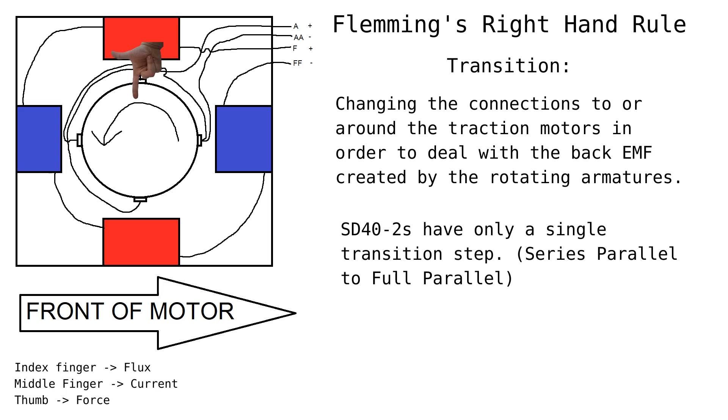This series isn't about those locomotives, however. This series is about SD40-2s, and -2s have only a single transition step, and that step is series parallel to full parallel. Remember in my cab tour video where I said we have S and P contactors, S for series, P for parallel? This is what that refers to.

So a super basic overview is the locomotive will start in series parallel to limit the number of paths for current. You only have to feed 3 paths instead of 6. Now as you speed up, the voltage drop across those traction motors is going to increase. Once you reach a certain speed, usually right around 23 miles an hour, the connections to the traction motors are altered from series parallel to full parallel to reduce the voltage drop.

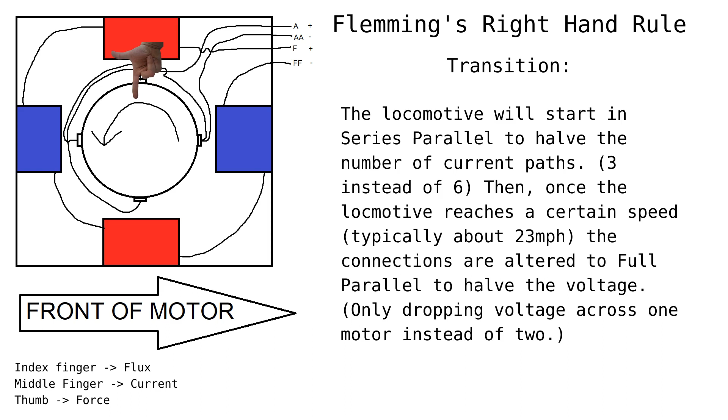Now you only have to shove enough voltage through one motor instead of two. At this point, you're limited by the horsepower you can produce with the diesel engine rather than how much current you can run through things without melting them.

That's a super simplified explanation of transition. Transition and the transition control module, which is one of the modules in the electrical cabinet, that'll probably be its own video, if not more than one video down the road. But for now, that's a pretty simplified look at how a traction motor works, as well as how it works in dynamic braking and why transition is a thing.

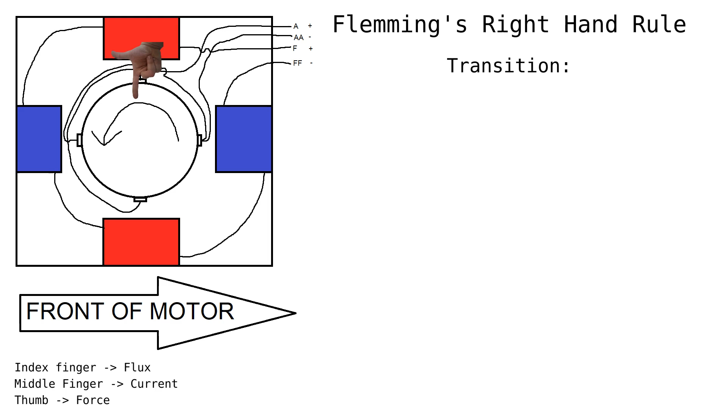I also want to mention before we get started that prints are shown with no power. Any magnetic contactors, any relays, anything like that is going to be shown dropped out. That doesn't necessarily mean everything will be shown open because there are such a thing as normally closed contacts. Now, speaking of stuff being dropped out, transfer switches don't really drop out or pick up. The whole point of them is they get to whichever direction they're supposed to be in and then they lock in and stay put.

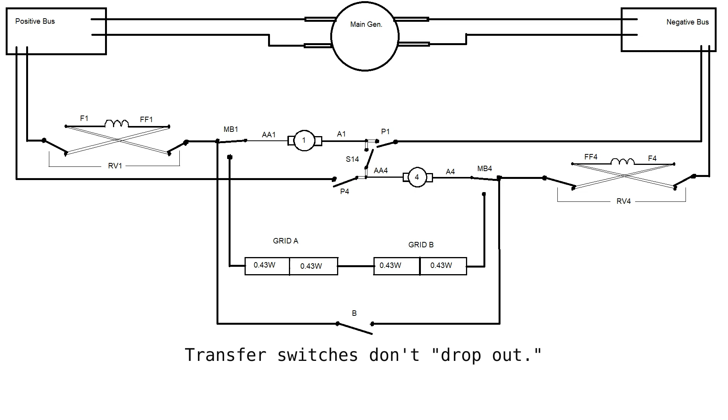This is one of the big advantages of these over magnetic contactors because there's nothing to fail that would cause it to drop out and burn up. But as such, they have to be shown in a certain position anyway, and the RVs are shown in forward, and the MBs are shown in motoring.

So the first thing I want to go through is what it takes to get one of these to move. It'll go through transition, and then we'll talk about how we change direction. If you want, you can follow along with the AAAFFF rule to figure out traction motor direction I told you about earlier. So starting out, we're going to start at the main.

This is where all our current comes from, and this is where it needs to be going back to. So we're going to start at the main. It's going to go out to the positive bus. And from the positive bus, it's going to go to one side of the RV1 transfer switch.

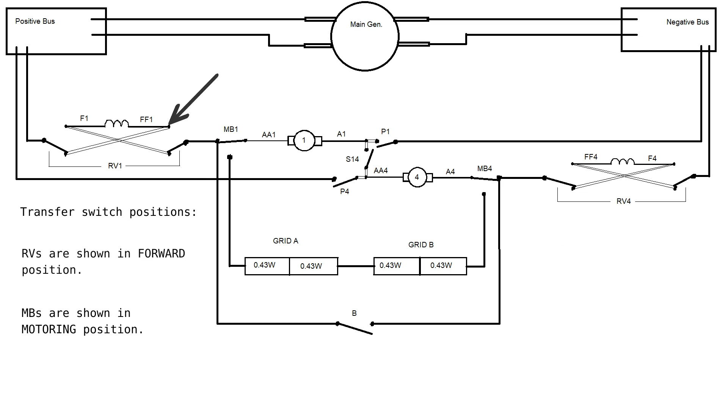In forward, the RV1 is going to send the current through a bus bar, which a bus bar is represented by an open shape rather than a solid line. Solid lines are normal cables. A bus bar is a giant metal bar. If you look in my switchgear video or my cab tour video, you can see some bus bars on top of all the transfer switches. That's all a bus bar is, and it's represented with an open shape like this.

So, in forward, RV1 sends the current through a bus bar to the FF1 lead, and it'll go through the motor fields. It will then come out of F1 through another bus bar, and then onward to MB1. Since we're in motoring, MB1 is going to be in motoring position, and that'll allow the current to proceed to the motor armature through AA1.

After exiting the armature, it will go through A1 and then arrive at another bus bar. Assuming we're starting from a stop, S14 will be picked up, which will send that current to another bus bar and then onward to AA4. Current will then flow through traction motor 4 armature, out A4, and into MB4, which is again in motoring.

And then that will go on to RV4, and in forward, RV4 will send that current to F4 through another bus bar. We'll then go through traction motor 4 fields, out FF4, and through another bus bar to the other side of RV4. That will then send the current back to the main's negative bus, and then go back to the main.

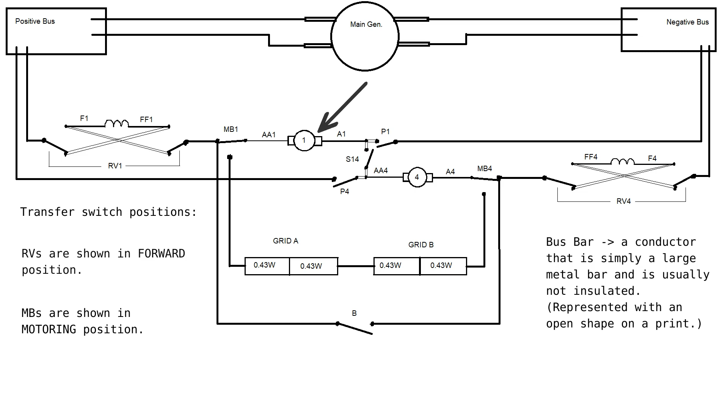So during dynamic braking, fields are connected in series with the main, and the armatures are connected in series with grids. Some locomotives have all the grids and motors in one circuit. It'd be armature, armature, grid, grid, armature, armature, grid, grid, and so on.

Some have them in 2, or you'll have 4 in one circuit and 2 motors in another. Others will have them in series parallel, just like in motoring we have 3 series parallel paths. They'll be set up the same way - 3 series parallel paths for the traction motor armatures.

So hopefully that all made sense. I know I've thrown a lot of information at you, and I'm not done yet. Having been through all that, why do these old locomotives use DC traction motors instead of AC traction motors, especially considering more modern locomotives use AC motors? Well, it really comes down to technology and, in later years, the cost.

Now, you might be thinking, remembering from earlier, I mentioned that our main generator isn't really a generator, it's an alternator. And alternators make AC current, right? Not necessarily. You can make a DC alternator, but it puts out AC current and we rectify it to DC for the motors. Why don't we just use that AC current for AC traction motors?

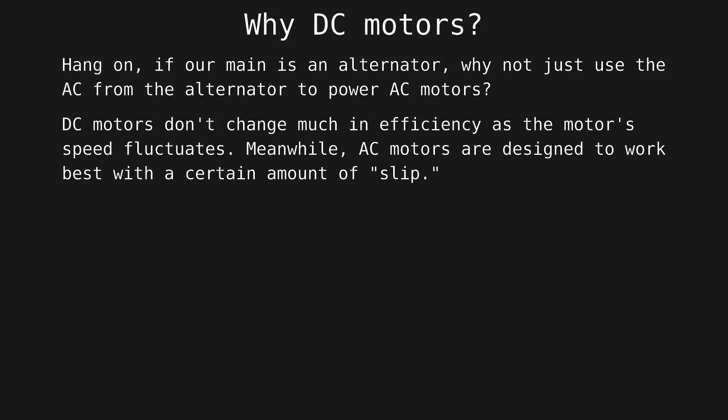Well, it gets complicated. Big advantage of DC motors is that unlike AC motors, they don't have a specific speed where they work the best. As a DC motor speeds up, all that changes is the voltage required to overcome the back EMF from the armature. AC motors, on the other hand, are designed to work with a specific amount of slip, which is the difference between the speed of the RMF, rotating magnetic field, and the speed of the motor.

The speed of the RMF is determined by the frequency of the AC current you're putting in, and the frequency of that is determined by - if we were to just directly connect the AC output from our main to the traction motors - the speed of the engine. And so it would go up in steps with our throttle notches.

And also, as we go up in our throttle notches, we're asking the engine to produce more power, not just go faster. And that doesn't bode super well for powering AC traction motors, because what if you want a lot of power at a really low speed or very little power at a very high speed?

Well, your throttle notches aren't going to work that great for you in that situation, because those AC motors would require a very smooth increase, and your throttle notches are going to go in steps. On top of the whole power versus speed issue, it's just a complicated system.

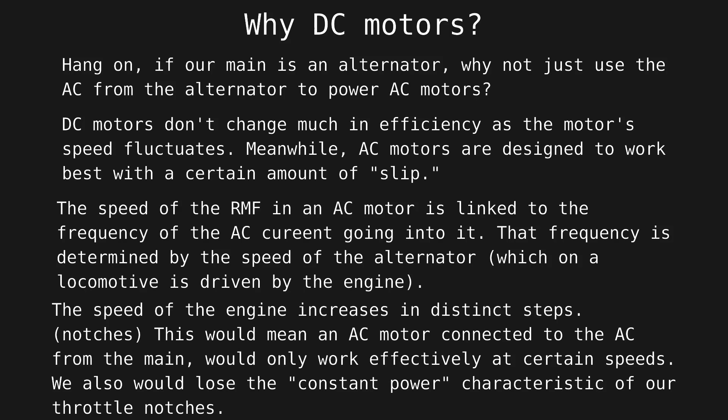So how do these modern locomotives with AC traction work? Well, I'm going to pull a bit of heresy for someone trying to be educational and talk about something I've never dealt with, but hopefully this will get the concept across. And if someone watching this actually has experience with AC traction, feel free to add anything or correct me. So a super simple overview of AC traction is this.

You have the main alternator output, which is going to be rectified to DC current and then sent to the inverters. The inverters are then going to take that DC current and invert it back to three-phase AC and send that to the traction motors.

Now, the frequency of that AC current is going to be determined based on throttle position and the measured speed of the axle. And that can either be the axle directly through an axle alternator, or it can be a traction motor speed probe. Either way, it knows how fast the axle is spinning, so it knows what frequency of AC current it needs to send to the motor.

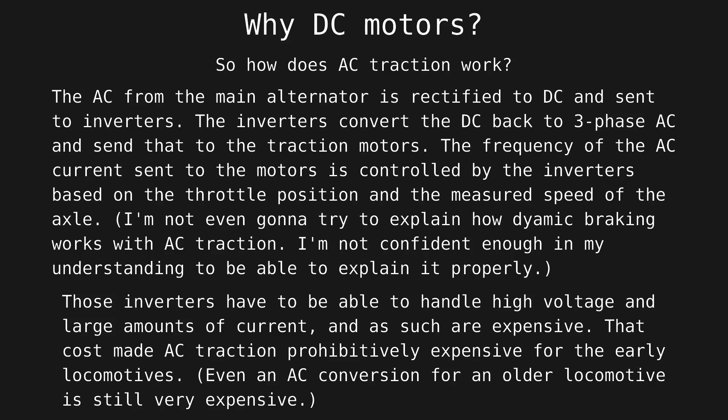Those inverters have to be able to handle a bunch of current, and when we're talking about high capacity solid state components, those usually get pretty expensive, and that's hence the big cost issue for a lot of these older locomotives. That having been said, AC traction motors are pretty much bulletproof compared to DC motors.

I heard a story from a guy who used to work for NS. Basically what he told me was they figured out that with AC traction motors, the motors are not the weak point. The weak point is the inverters. You will melt and burn up the inverter in the aux cab before the motor even knows what's going on.

The guy told me that there was a demonstration they did with the AC traction motors where they just overloaded the heck out of them with a cold drag, dragged it up a grade until they stalled, then let it sit there with the throttle wide open, tied a bunch of stuff down so it wouldn't roll away, and went to lunch. When they came back, everything was still sitting there loading, eighth notch, wide open, sitting at stall for like an hour, and everything was fine.

So to put all that information in a sentence, we use DC traction on these older locomotives because for AC to work efficiently requires a more complex system, and the inverters for that system are expensive. So it mostly just comes down to cost, like I said.

Whew, okay, that was a lot of information. Now before we get out of here, I mentioned a couple catastrophic failures, and I also mentioned earlier what a flashover is. I haven't forgot, that's what's coming up next.

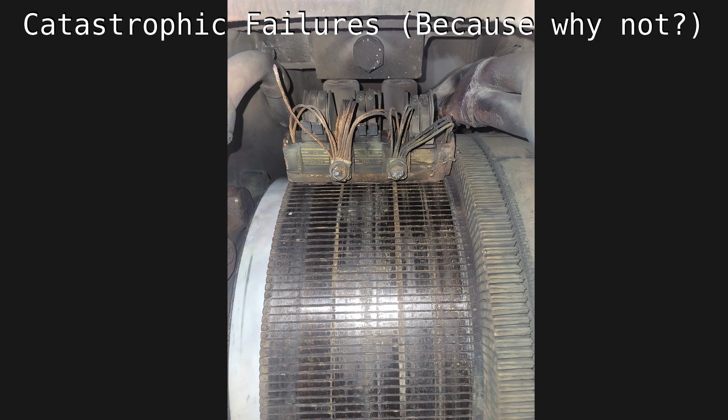Having shot the armature and found out, oh yeah, it's open, we opened the traction motor cover, and, well, I saw this. If you ever wondered what a flashed traction motor looks like, it's this. Everything gets melted - the commutator, the brush holders, the brushes, brush leads, cables, all kinds of stuff gets melted during a flashover. So what exactly causes a flashover anyway?

Well, there's different potential specific causes: over voltage, you could have commutator or brush issues, brush dust can cause it, just dirty cooling air can cause it because of the dust in the cooling air.

A flashover happens when the voltage applied to a traction motor is high enough to begin to establish an arc, usually from the brush holder to the commutator or something similar. As the arc is established, the resistance needed to get across that air gap drops. Ionized air has a lower resistance than non-ionized air, so as the arc is established, you need less voltage applied in order to sustain it.

That drop in voltage means that for the same amount of power being put in, the amperage will rise dramatically. A huge increase in amperage will cause a lot of heat to build up very, very quickly. This effect is compounded by the fact that as the voltage drops, less current is going to go through the other motors, and more of the current is going to go through the one that's currently blowing itself apart.

And the end result is you can get a very high amount of current, and that melts a lot of stuff, usually a very burned up commutator, brushes, and brush holders, and at the end of it all, the motor's just junk and needs to be replaced.

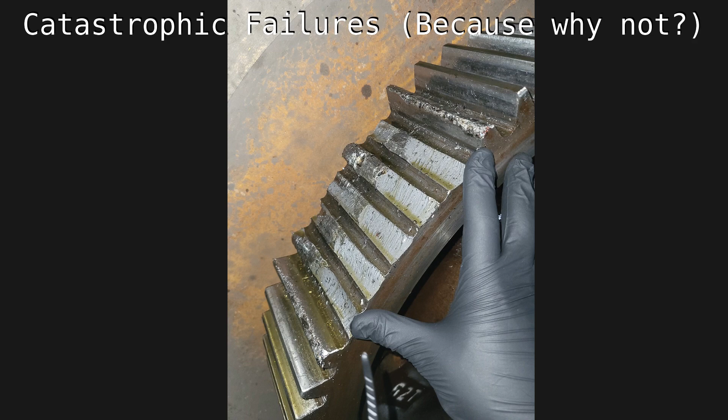Now this happened on the weekend, and the next day I came in, I managed to find this wheel set laying around. Yeah, get a load of that. The bull gear failed and lost a bunch of teeth in the time it took for them to be like, hey something's broke down here, and then us to go look at it, and then the time it took to get it up there, it sheared just a bunch of teeth off the bull gear. I tried to find the pinion and couldn't, so you'll just have to settle for the picture of the bull gear. But yeah, this was the first and only time I've ever seen a gear case failure on a locomotive.

Not sure exactly what caused it. I don't know if they were trying to apply a lot of power and then it wheel slipped and then caught on a joint or a frog or something random, and that sudden impulse was enough to break a gear tooth off. I don't know. And like I said, I never did find the pinion, I have no idea what that looks like.